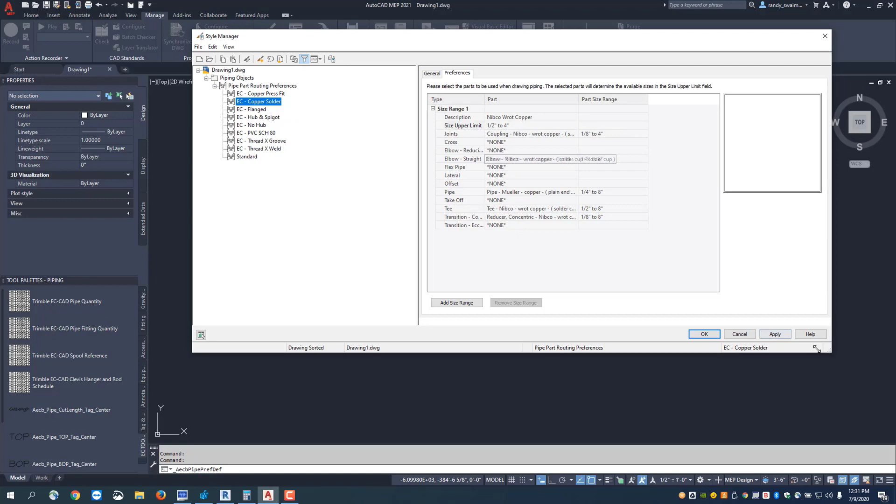I'll OK that. Now I'm going to look at my pipe fabrication preferences, which are on the Home tab underneath the Fabricate pull down, and select pipe fabrication preferences.

There are other items that don't work inside the routing preference, such as valves, caps, and P-traps, that don't have a place to live there. So they have a place over here instead.

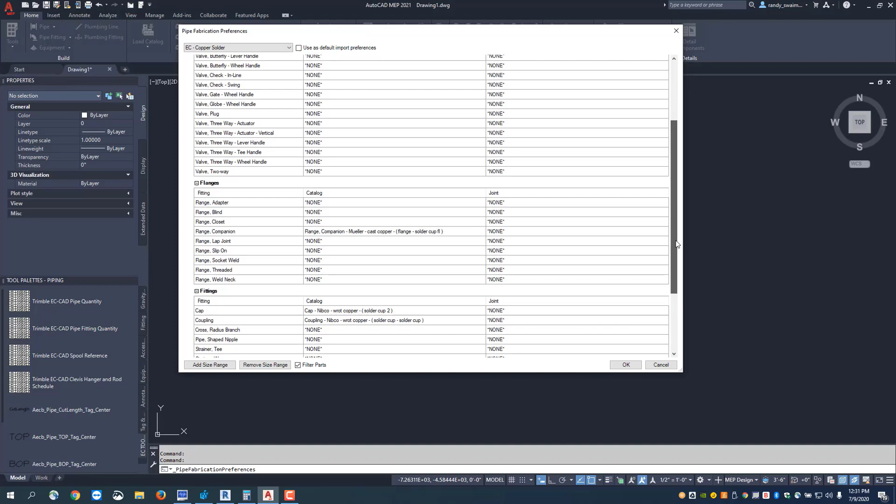You can see I've told it that if it sees a ball valve, it should come in as an Apollo Conbraco bronze valve. Scrolling on down through here, you can see where I'm going to bring in a cap as well. So this is set up the way I want it.

Now I can come up to my Insert ribbon, go to Revit, and tell it I want to import this file, mapping it to whatever preference I want, in this case copper solder, and then I'll just say Finish.

Depending upon the size of the file you've brought in from Revit, it could take a couple of minutes to bring into EC-CAD. You'll notice in the lower right hand corner of the screen an Importing Revit Systems status bar, which will let you know when it's through importing, and the system will also paint up on the screen.

Now that the system is just about through importing, it's going to go through and detail it, and then paint it up onto the drawing. So now that it's painted up, we can see it's brought in a lot of information.

The first thing you want to do is go to your Home ribbon and go to the pull down under Load Catalog and select your error log. This will show you if there are errors in this import, and it will jump right to where the error is.

Right now I've got a female to female type joint conflict. To fix that, I'm going to select the pipe, and I'm going to select the grip of the pipe.

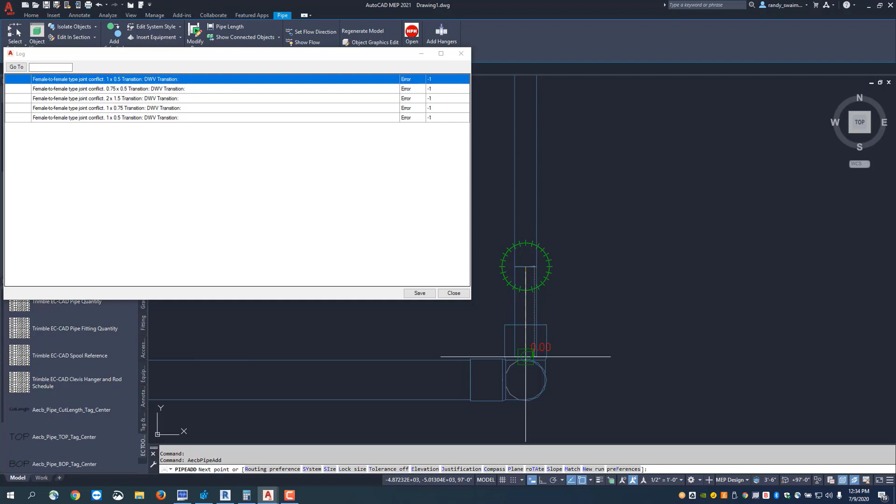Now I'm going to pull this into my part till I get my snap. Once I get my snap, I can just click onto that, and it puts the reducer and everything in there for me. I just hit enter, and that's fixed.

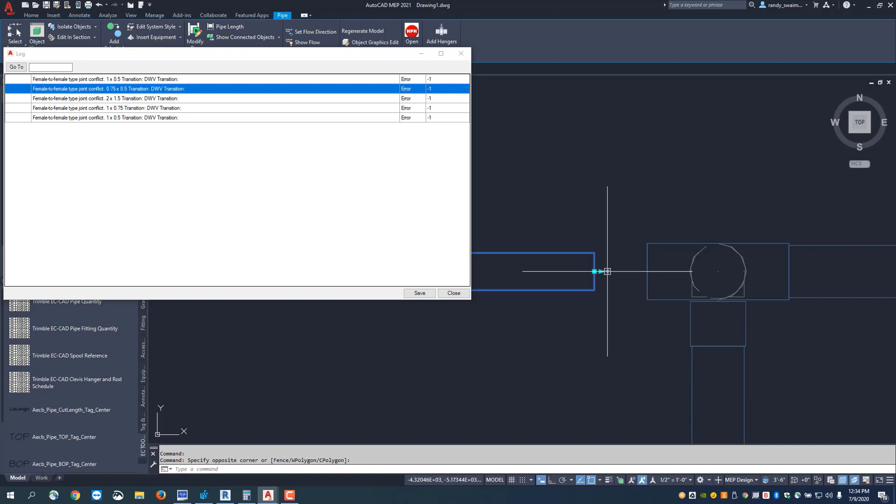To go to the next error, you just click here, and that can be fixed the same way: make your selection on the pipe, bring it over until we get our grip, and once the grip shows up, we click and bring that in.

We can come back now and do other things with this model. I'm going to select a piece of pipe, because it will bring in the pipe in full length joints as it was drawn in Revit.

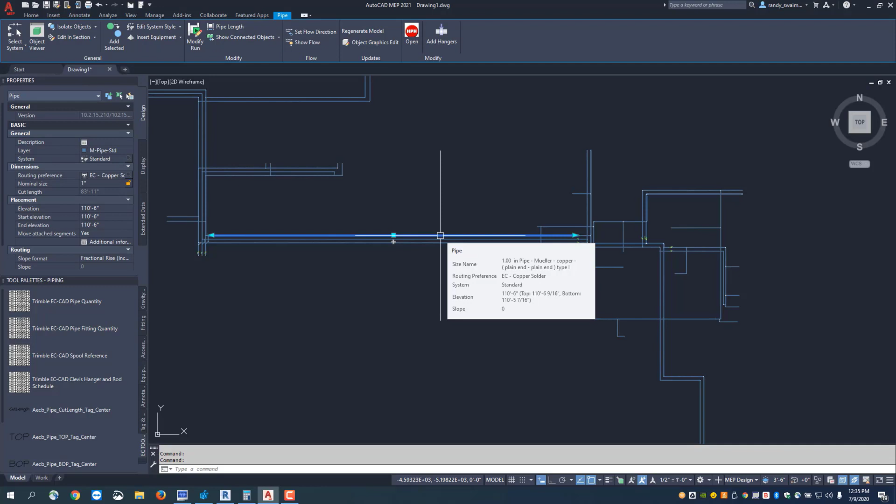So I want to make them into 20-foot joints. I've clicked onto a piece of pipe, then right click and go to pipe length. Now I want it to go ahead and break this into 20-foot joints.

I'm going to tell it I want to select my objects, so I go ahead and select the entire run. Now I want to break it, apply that, and then OK that.

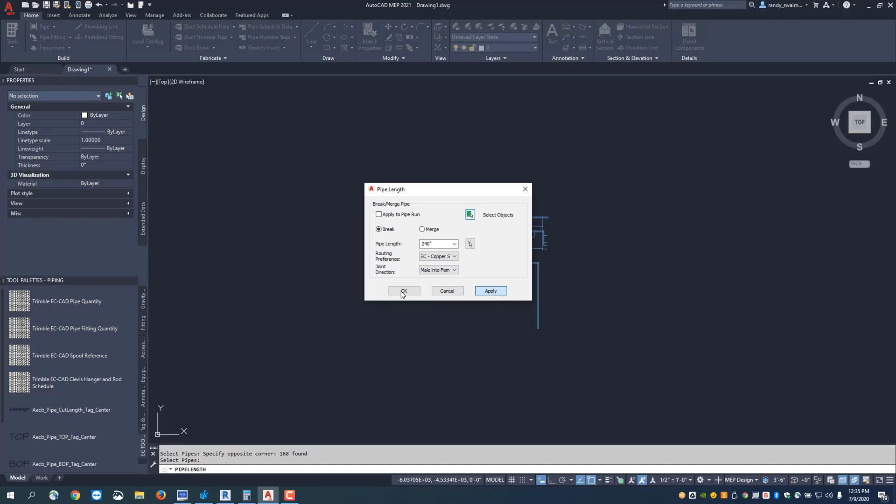Once it's through breaking that up, it's come in and added couplings for me everywhere it's broken that joint. We can also run a bill of material and get all of the cut lengths of every piece of pipe.

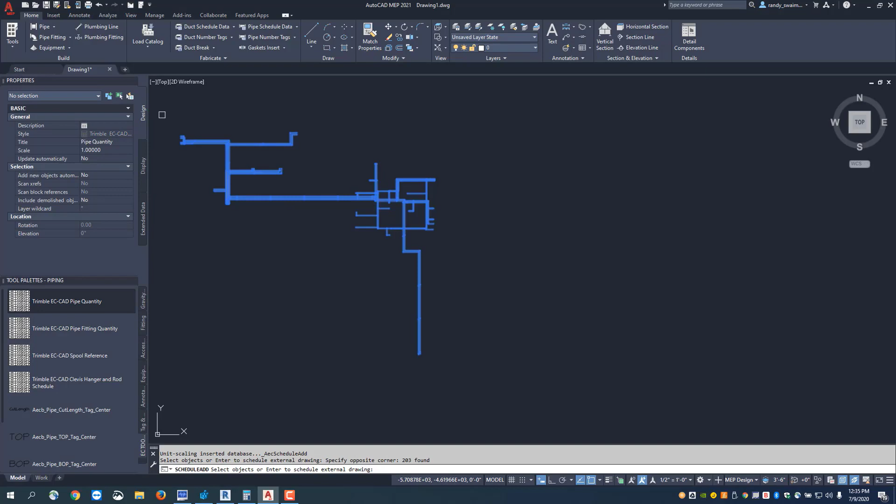By just clicking onto our Trimble EC-CAD pipe quantity schedule, I'll select the entire portion, and then have my schedule here. This is a cut length of every piece of pipe in the model.

If I want to modify this, maybe I want it to total all the sizes. I can right click, edit schedule table, go to total length, and say I want to modify this column and turn on my totals.

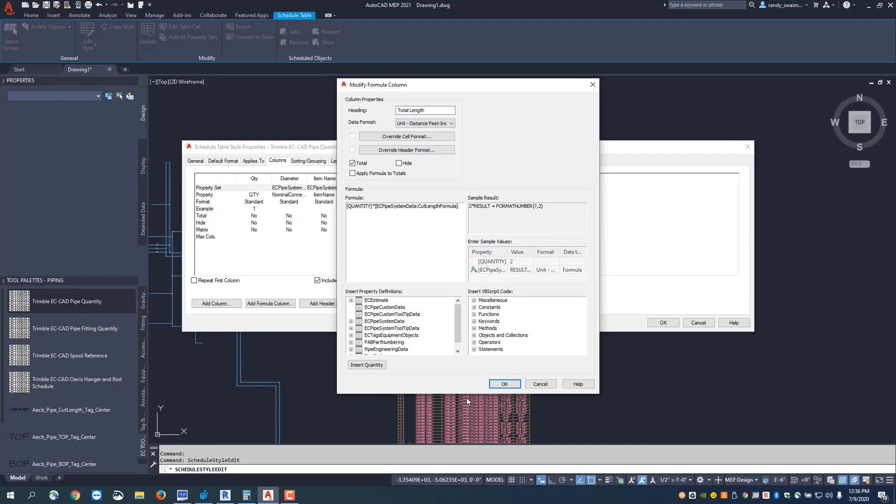As I hit OK and OK, now it's added totals to the bottom of each size category. So we took just a few minutes here to bring in almost 1,500 lineal feet of pipe.

And that's how you can use the EC-CAD to import your Revit systems.